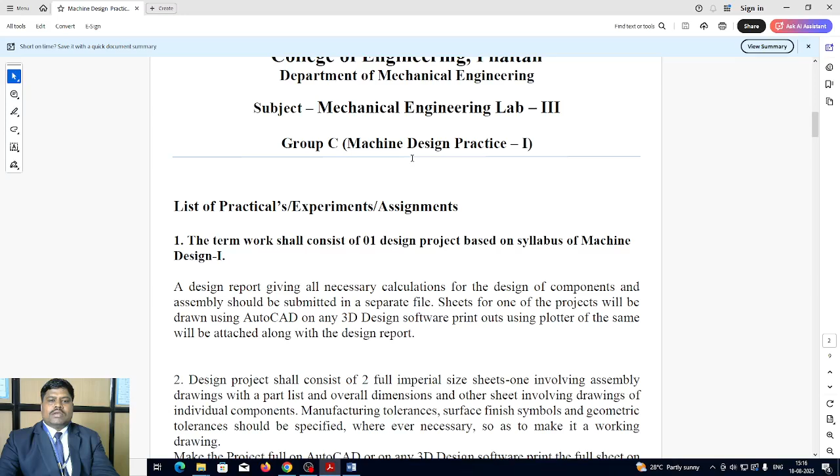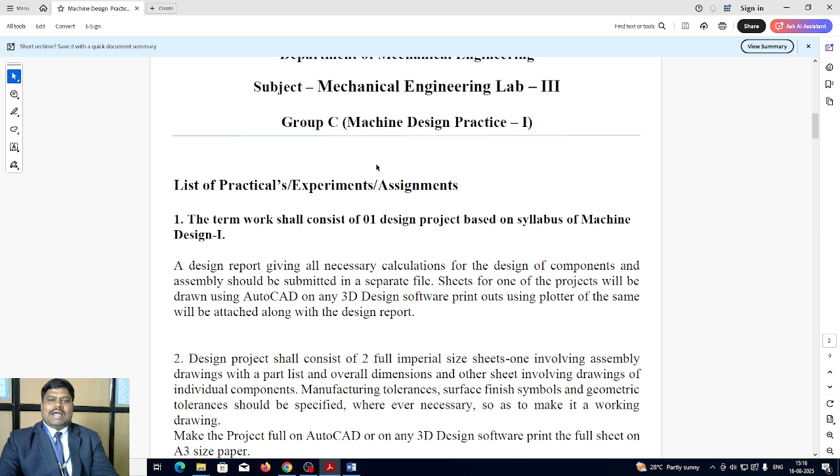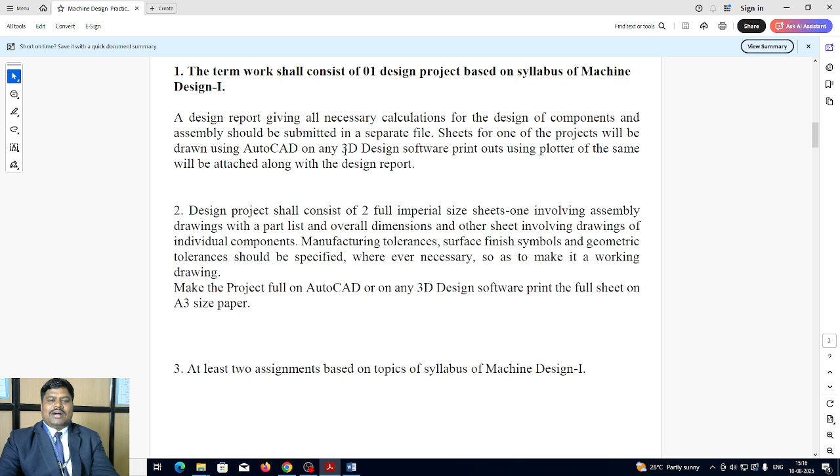In Machine Design Practice 1, there are three practicals. First is a design report giving necessary calculations of the design components and assembly. Second, we need to draw this design on A3 size sheet as assembly and the different components. Third is at least two assignments of the same need to be drawn. The first practical, the design report giving all necessary calculations for the design components and assembly, should be submitted with separate files.

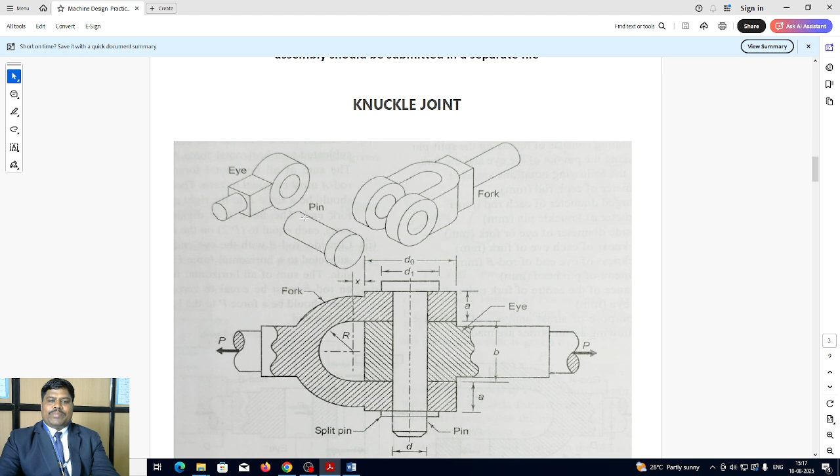For this we have taken the knuckle joint. Basically for the knuckle joint we have three components: first the eye, second the fork, and third the pin. These are the three components, and you can see the assembly of the three, with different dimensions given here. Now we can see this knuckle joint in a static condition.

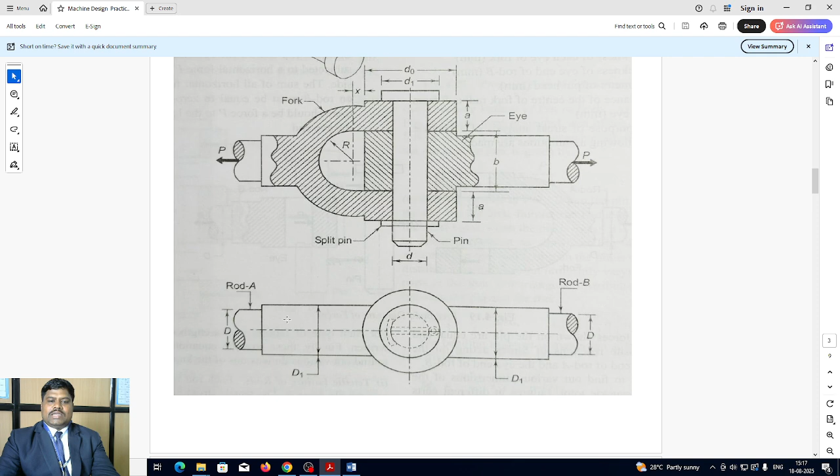Force P is applied on both sides, on the fork and on the eye, and the pin assembles both components. You can see the top view here, with different dimensions shown.

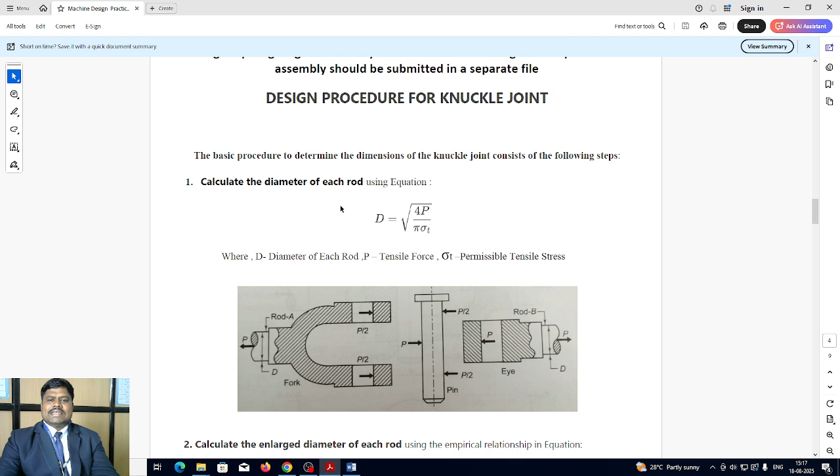What is the design procedure for the knuckle joint? First we need to calculate the diameter of each rod. P is the force applied on both sides, on the fork and on the eye. We consider tensile stress as the failure criteria.

This total force P on the fork is divided into two parts, P by 2 and P by 2. On each component the total force is considered on the left side and right side similarly. From this we get the relationship D equals square root of 4P divided by pi into sigma T, where D is the diameter of each rod, P is the tensile force, and sigma T is the permissible tensile stress.

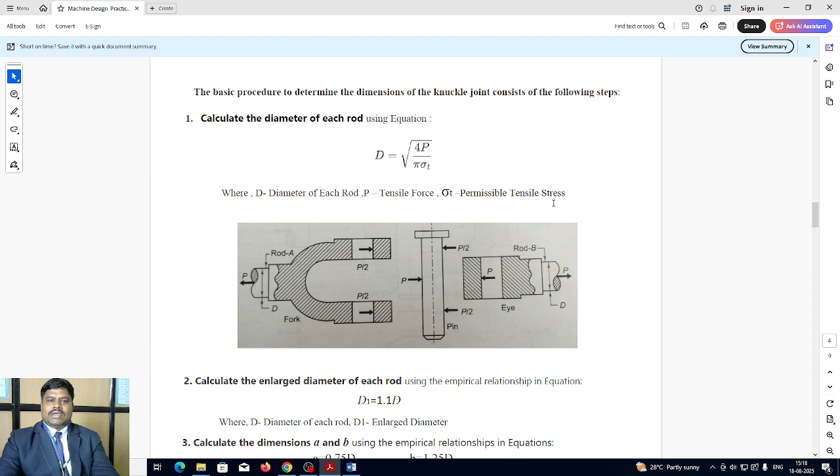Second, calculate the enlarged diameter of each rod. We have an empirical relationship for the enlarged area here. D1 equals 1.1 times D, and from this we find the enlarged diameter of each rod, where D is the diameter of each rod and D1 is the enlarged diameter.

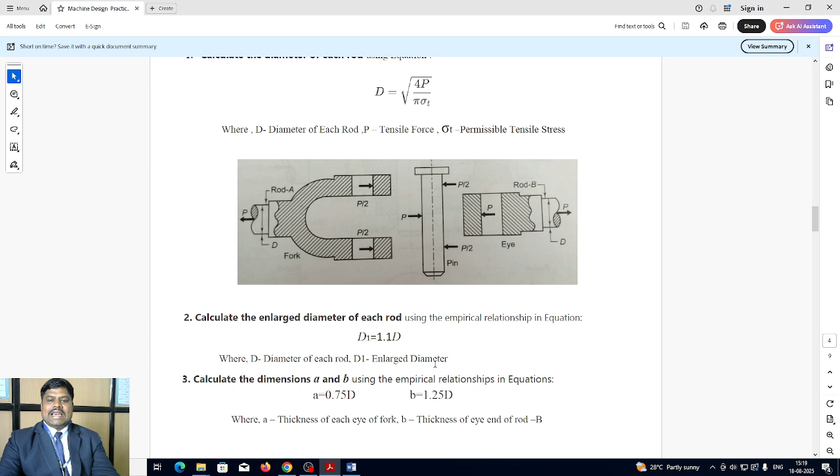Third is the calculation of dimensions A and B. A is the thickness of each eye of the fork, this thickness here. And B is the thickness of the eye end of the rod.

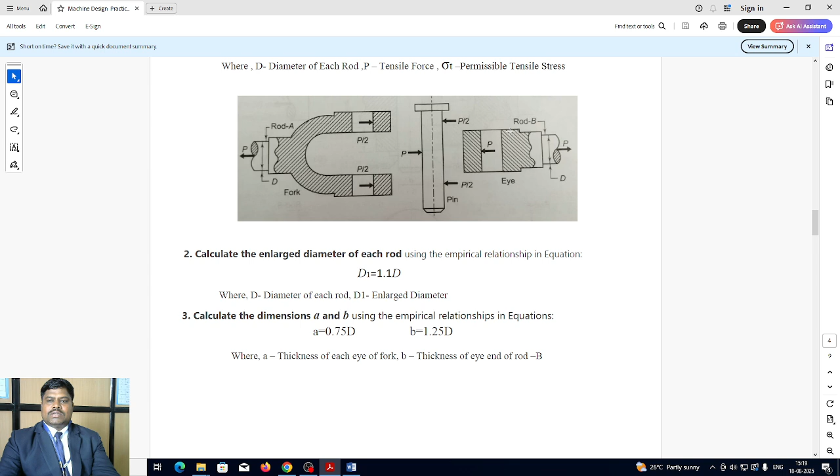The empirical relationships are: A equals 0.75 times D, the diameter of the rod, and B equals 1.25 times D, where D is the diameter of the rod.

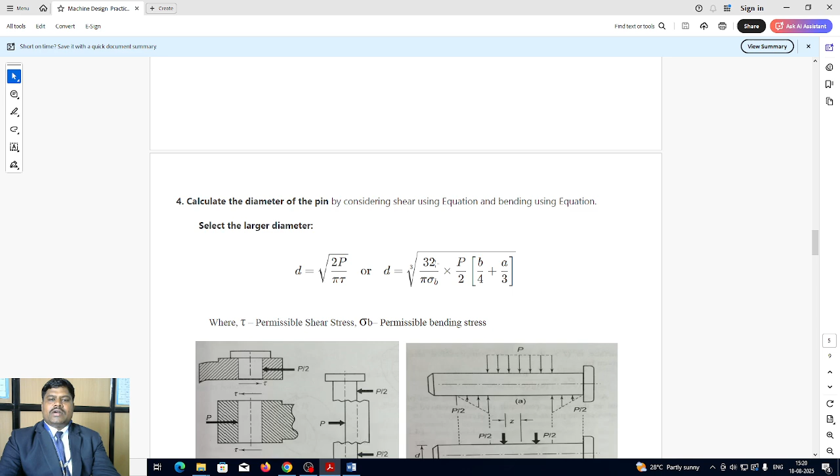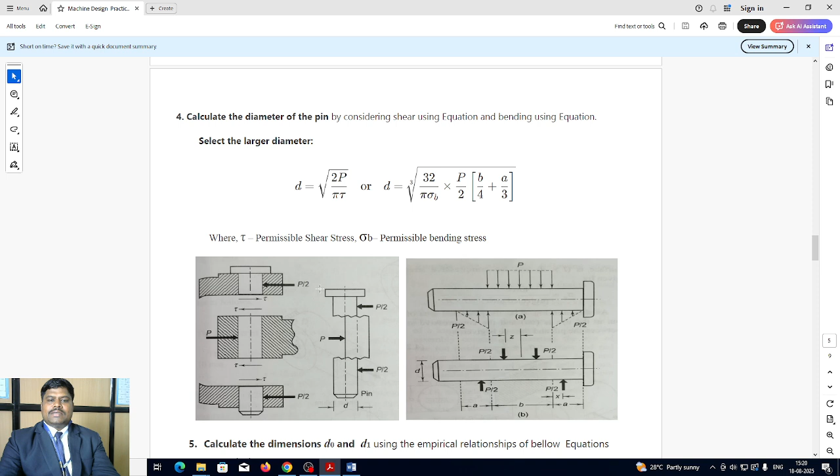Fourth, calculate the diameter of the pin. Two failure criteria are considered: shearing and bending. Considering the shearing failure, the first relation to find the diameter of the pin is D equals square root of 2 times force applied on the rod divided by pi into tau, where tau is the permissible shear stress for the given material.

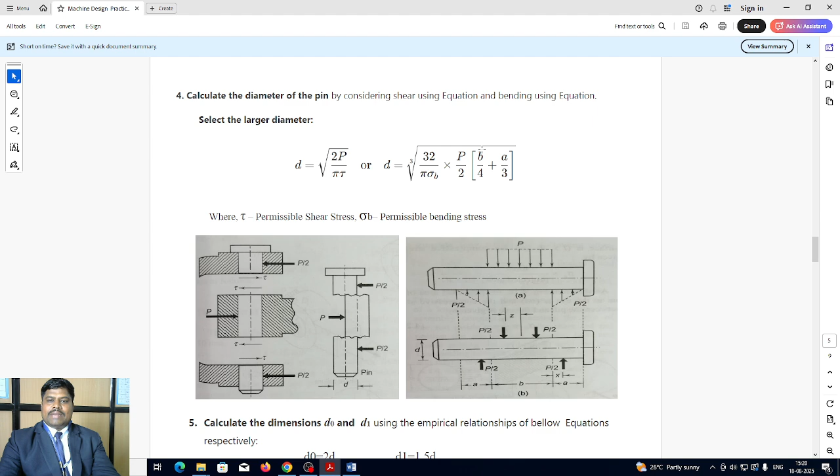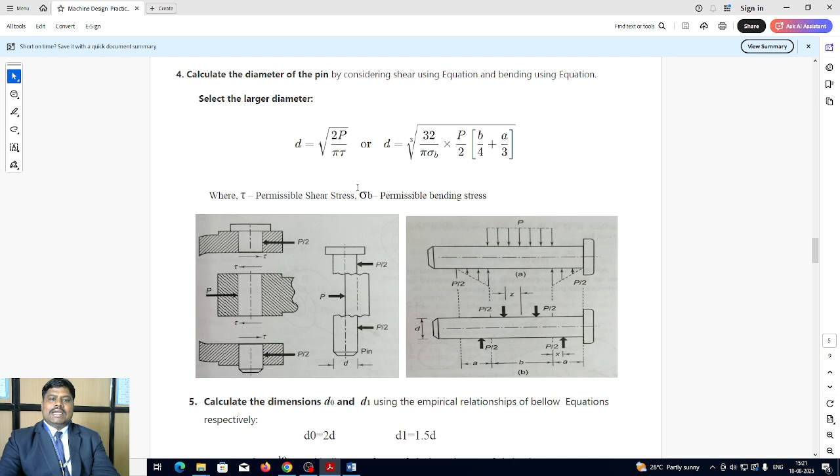For the bending stress given here, we get the relationship D equals cube root of 32 divided by pi sigma b into P by 2, in square bracket B by 4 plus A by 3. From these two relationships, whichever gives the largest value, we select that as the diameter of the pin.

Fifth, calculation of dimensions D0 and D1, where D0 is the outside diameter of the eye or fork and D1 is the diameter of the pin head. By selecting this, we use the crushing stress, sigma c.

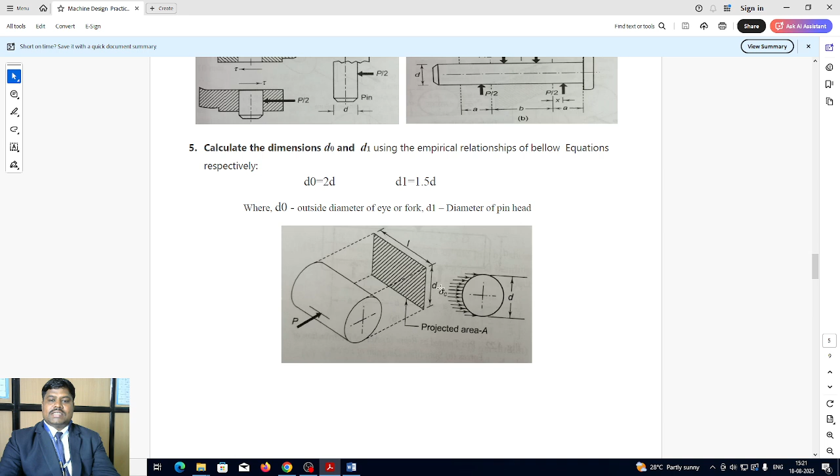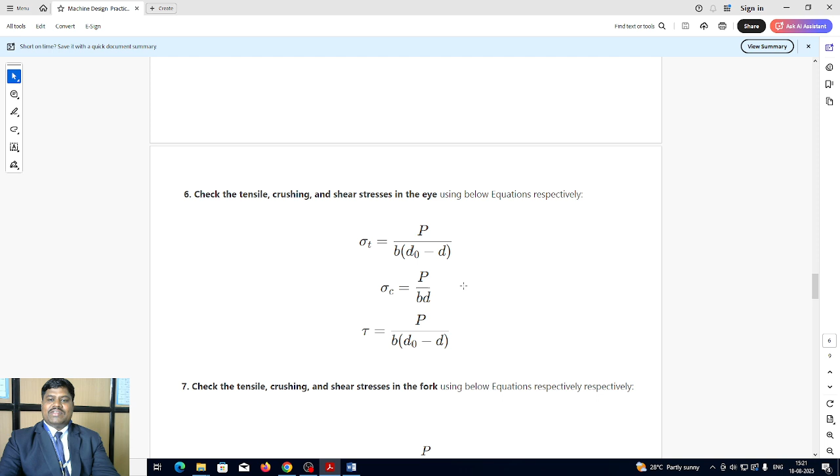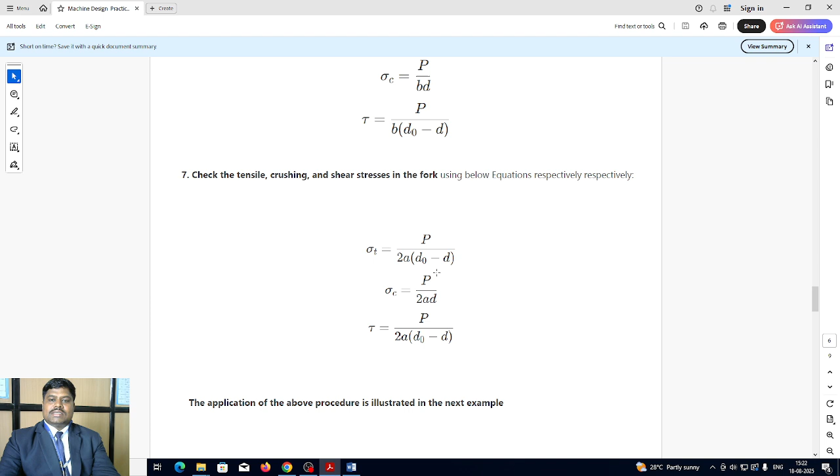Sixth step is to check the tensile, crushing and shear stresses in the eye, using these formulas, putting in values to check whether all stresses are within limit. Similarly, the seventh step is to check the tensile, crushing and shear stresses in the fork, using these formulas to verify the stresses are within limit.

So these are the steps, and now we will take an actual example of the knuckle joint.

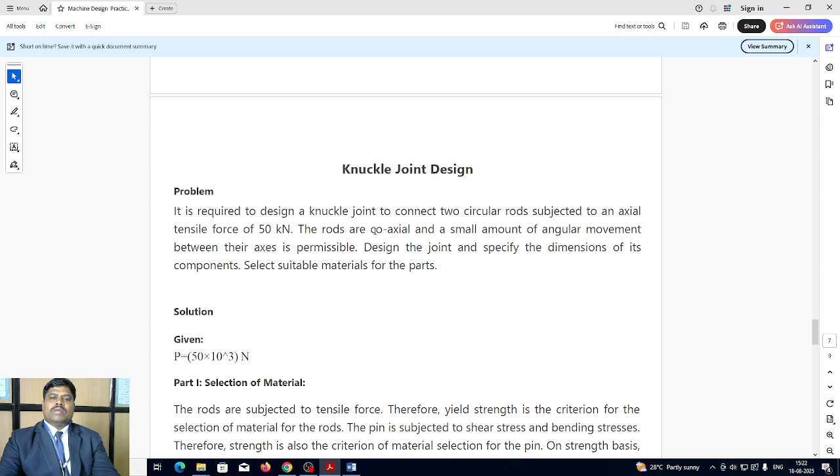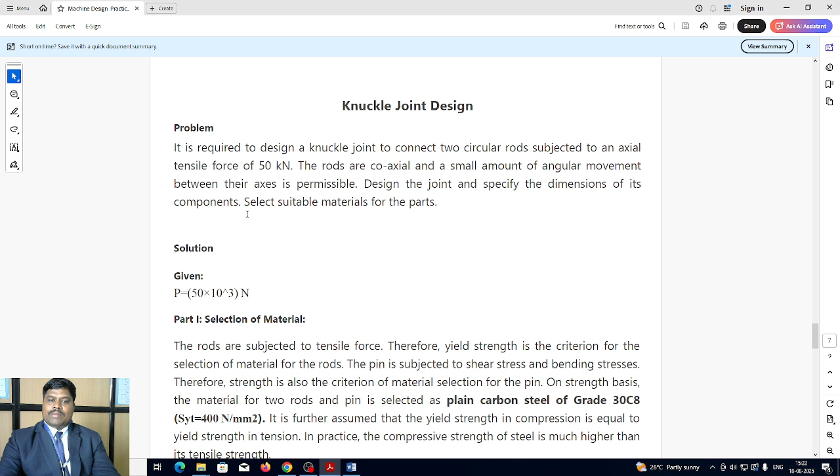So here is the example. It is required to design a knuckle joint to connect two circular rods subject to an axial tensile force of 50 kN. The rods are coaxial and a small amount of angular movement between their axes is permissible. Design the joint and specify the dimensions of its components.

So as only force is the known quantity here, the given data is a 50 kN force.

Now the first step is the selection of the material. As we know this is a rod subjected to tensile force, therefore yield strength is the criteria for selection of the material of the rods. The pin is subjected to shear stress and bending stresses, so strength is also the criteria for material selection of the pin. On the strength basis, the material of the two rods and pin is selected as plain carbon steel of grade 30C8, whose yield strength is 400 Newton per mm square.

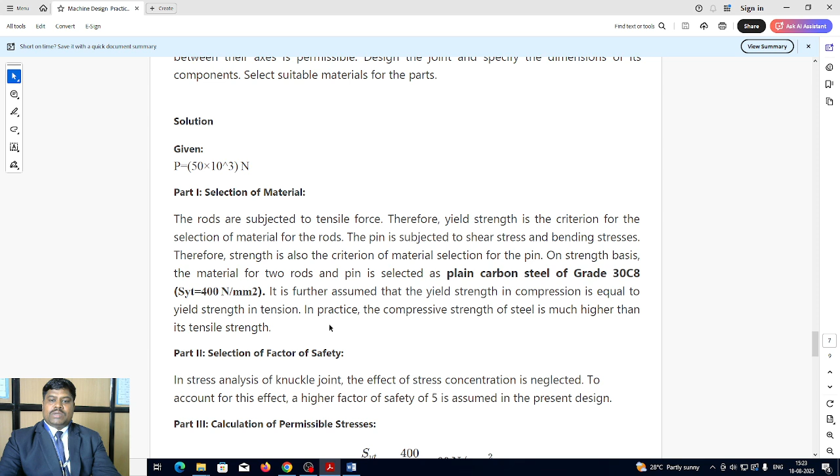It is further assumed that the yield strength in compression is equal to yield strength in tension. In practice we know that the compressive strength of this steel is much higher than the tensile strength.

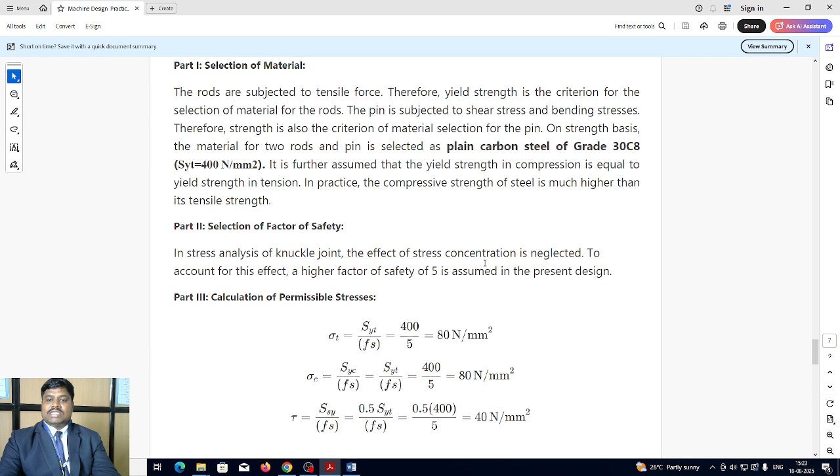Second step is selection of the factor of safety. As in stress analysis of the knuckle joint, the effect of stress concentration is neglected. To account for this effect, a higher factor of safety of 5 is assumed.

Third step is the calculation of the permissible stresses, where tensile stress, crushing stress, and shear stress are calculated by putting the values into these equations.

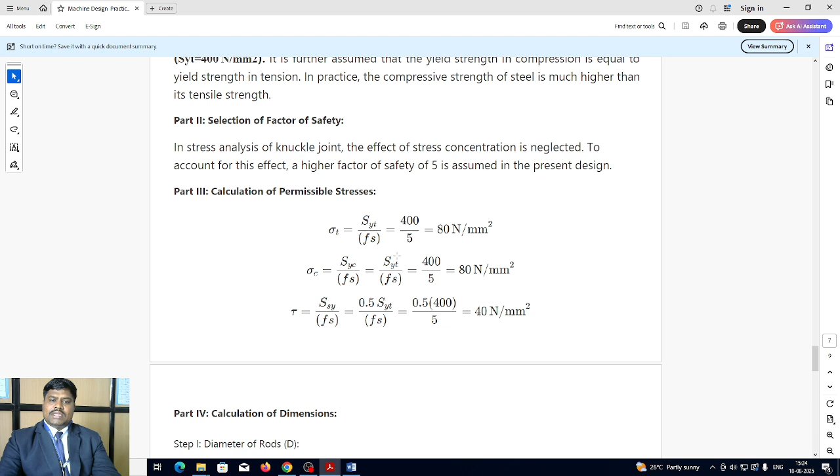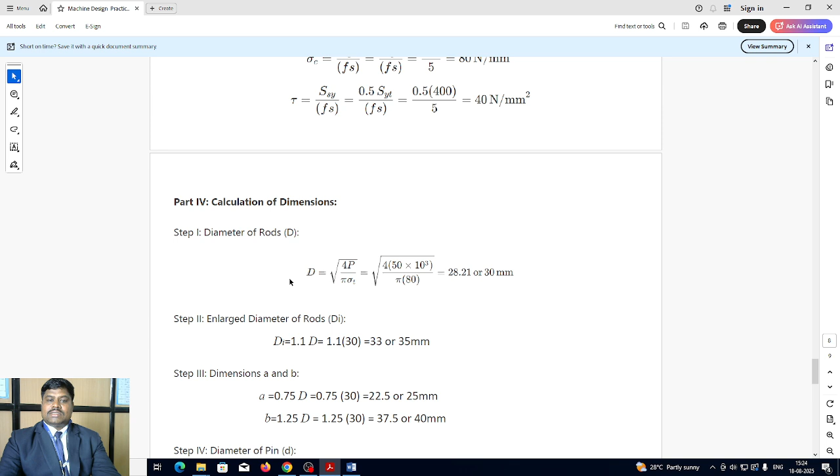Fourth, calculation of the different dimensions. As we have seen in the procedure, first of all we need to calculate the diameter of the rod. Its formula is the square root of 4 times the force applied on the rod divided by pi into permissible tensile stress. So the value of the diameter comes to 28.21, but we approximate it to the next value of 30 mm because standard shafts and rods are available in 30 mm.

Then the enlarged diameter is the second dimension, that is d1, 1.1 times the rod diameter. So we got 33, we make it 35 as a standard.

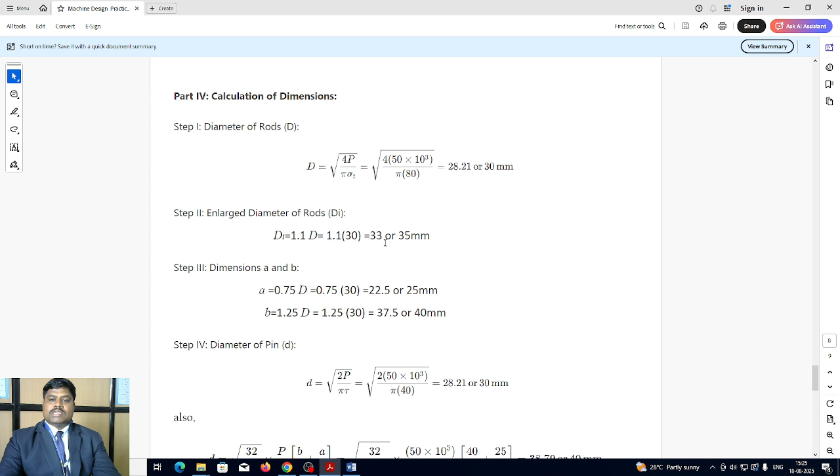Then dimensions A and B: as we know, A is the thickness of the fork given, and B is the thickness of the eye end given. These two values are A equal to 25 and B equal to 40 mm.

Then the diameter of the pin is calculated by the two methods discussed above, by shearing and by bending. By the shearing criteria we got 30 mm diameter, and by bending as the failure criteria we got 40 mm. So the larger value from both we need to take. Here we have taken 40 mm diameter as the pin diameter.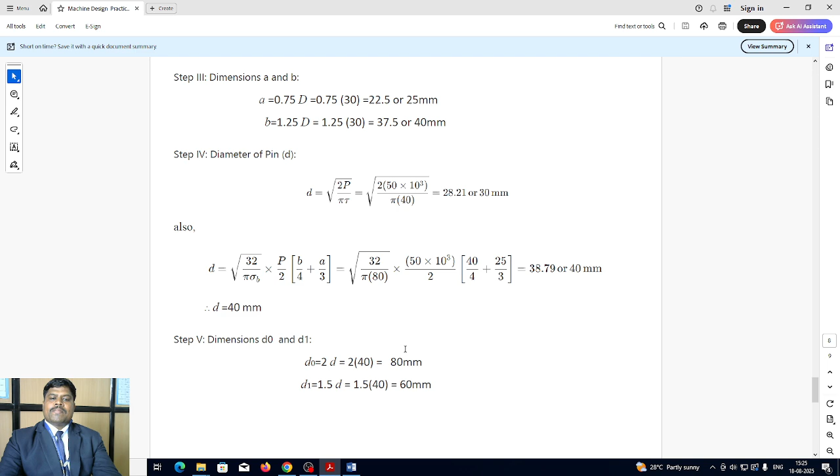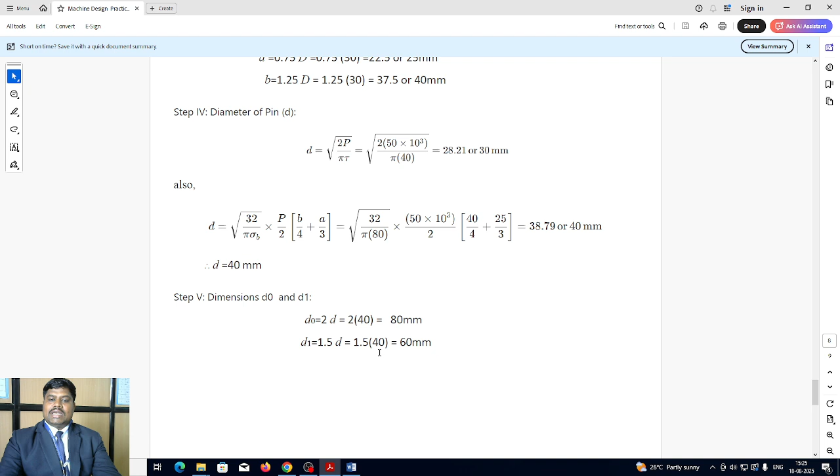Through the empirical relationship, D0 is equal to 2 times D, so 80 mm is coming here, and D1 is 1.5 times D, so this value is 60 mm here.

Now for the check of stresses in an eye, as discussed previously: tensile stress is 31.25, which is less than 80 Newton per mm square. Crushing stress is also 31.25 Newton per mm square, which is less than 80 Newton per mm square, so it is also safe. Checking for the shearing stress in an eye, it comes to 31.25, which is less than 40 Newton per mm square.

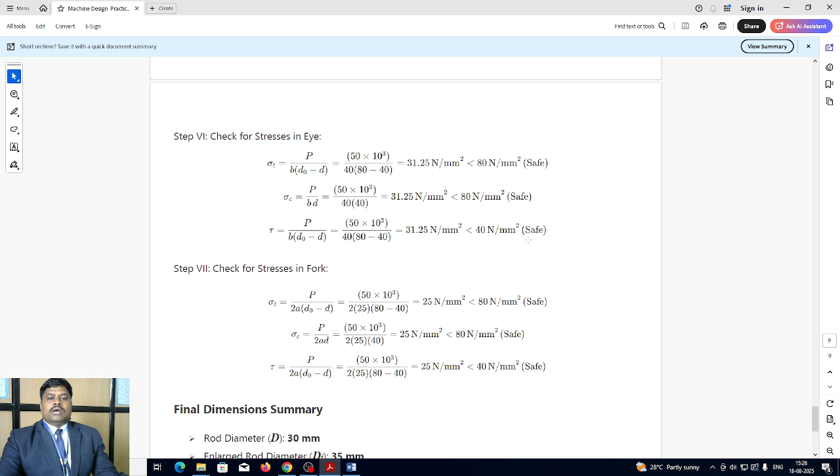Seventh is the last step, the check for stresses in a fork. Tensile stress is coming at 25 Newton per mm square, which is less than 80 Newton per mm square, which is safe. The crushing stress is also coming the same, 25 Newton per mm square, which is less than 80, which is safe. Finally, the shearing stress on the fork is 25 Newton per mm square, which is also less than 40 Newton per mm square, which is safe.

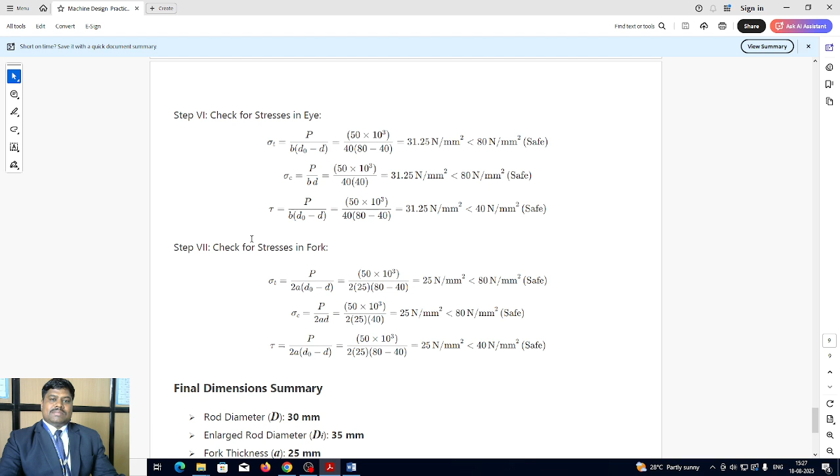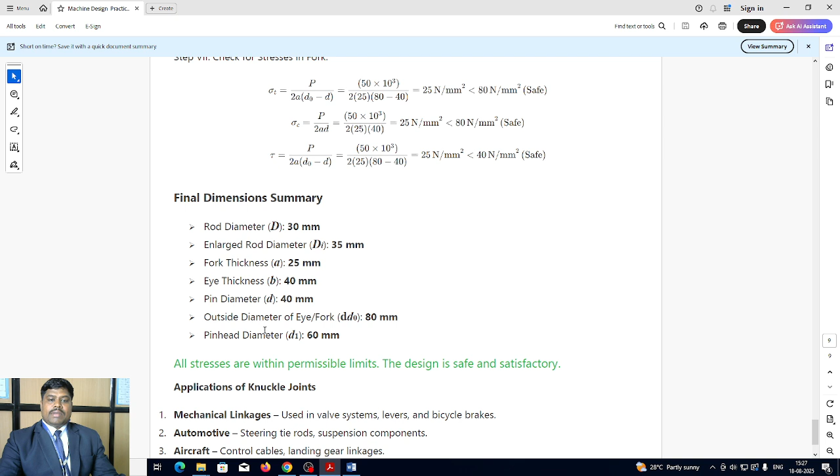So checking all the dimensions, whatever we got is safe as per the given failure criteria for the eye and fork. So the final dimensions: rod diameter is 30 mm, enlarged rod diameter is 35 mm, fork thickness is 25 mm, eye thickness is 40 mm, pin diameter is 40 mm, outside diameter of the eye or fork is 80 mm, and pin head diameter is 60 mm. So all stresses are within permissible limits and the design is safe and satisfactory.

So where are we using this knuckle joint? We use the knuckle joint in mechanical linkages used in valve systems, levers and bicycle brakes. In automotive, we use knuckle joints in steering tie rods and suspension components. In aircraft as well, we use them in control cables and landing gear linkages. In cranes and excavators, for load bearing joints in booms and hooks. In railways, for couplers between rail cars. In marine, for rudder assemblies and towing systems. And in industrial machines, conveyors, presses and tensioners.

So this is our first practical where we need to prepare the report of design of any machine component, and this is a knuckle joint, as I have explained the different aspects. We have seen the procedure, and with the example we have seen how the knuckle joint is designed. So all the design aspects we have seen.